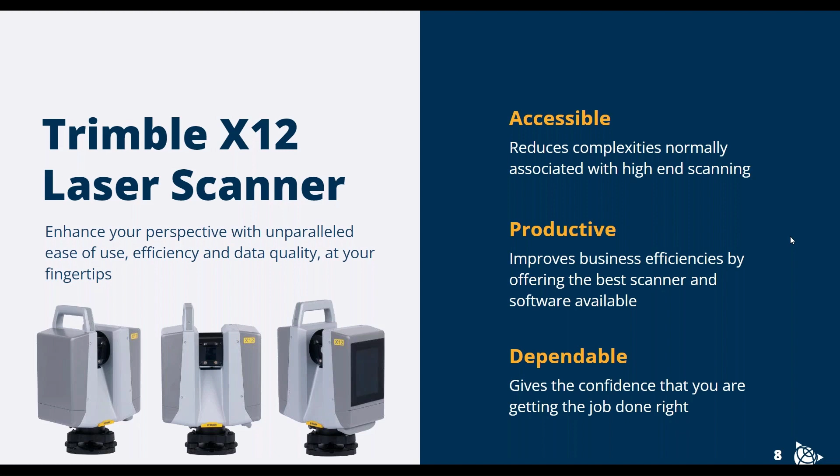Awesome, and yeah, let's get started and let's learn a little bit about the new X12 laser scanner. So starting off, this is obviously our new high-end scanner that complements the X7 well for applications that require longer distances. So when we really talk about how this unit is accessible, it's really bringing that same simple workflow. If you're familiar with the X7 workflow and Perspective, it's a very easy to use, streamlined workflow to get your scanning project done in an efficient manner without having to go back on site.

So if you haven't been able to use the X7 yet or the X12, I highly suggest reaching out to Keystone and getting a demo of the unit to really understand how the software works. And I really think that anybody who uses it will really enjoy it, especially the field crews, and how nice it is to have that tablet with you to be able to register your scans together on the fly.

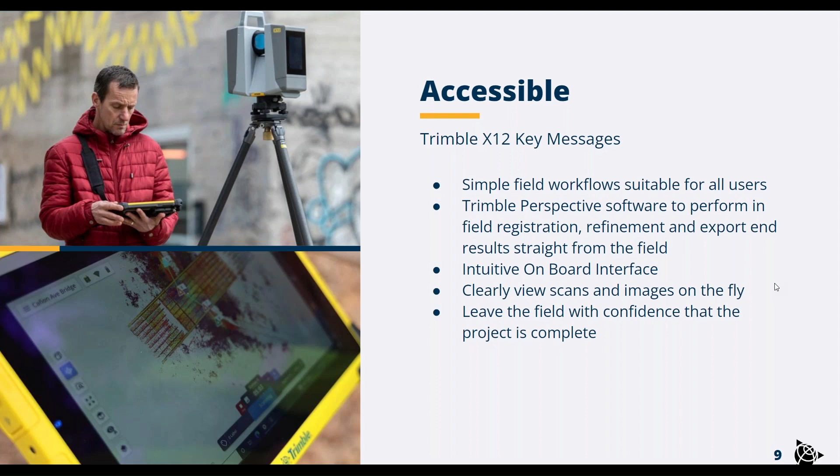Now, with the X12, it really is a fast scanner that can get you really great data on site really quickly. The shortest scan is up to 23 seconds. One of my favorite features that we'll go into a little bit later is that integrated LED spotlight. I have a little anecdote, but I'll save that for a slide later, but it is really one of my favorite things about this scanner.

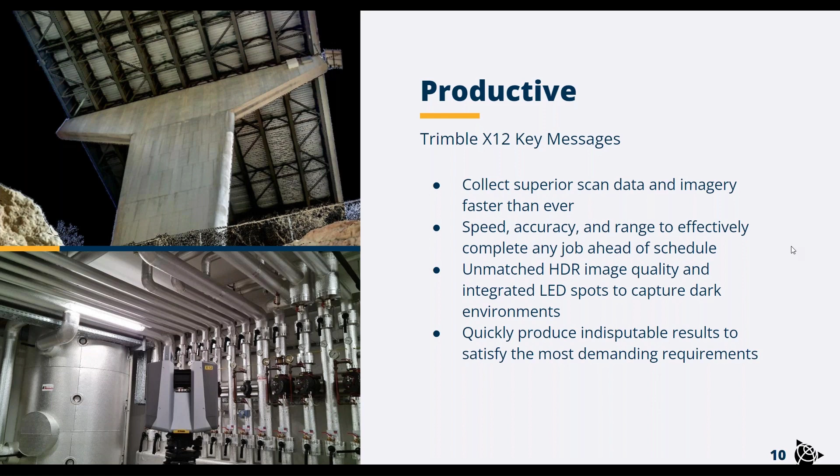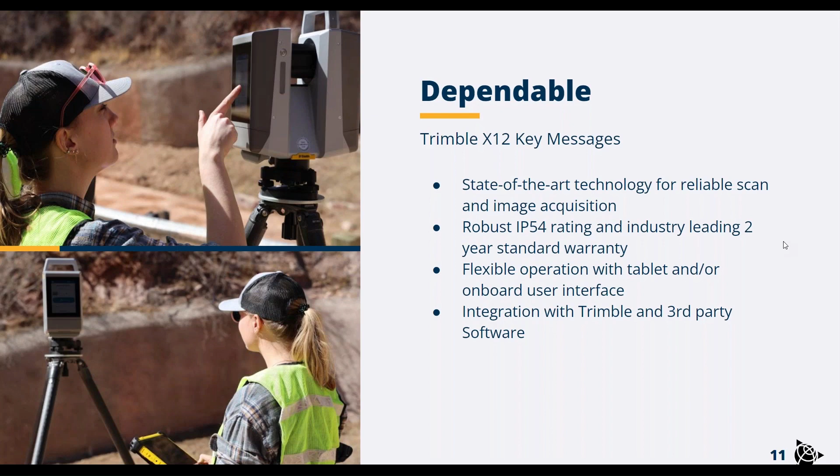And dependable. Our MAT team, when we test this, we really put this through quite a bit to make sure that it was up to the Trimble standard. Just like with the X7, this has a standard 2-year warranty. And we'll go into it more, but you'll see that unlike the X7 here, this scanner actually has a full onboard interface. And we'll show you the highlights of that a little bit later.

So highlighting some of the key features here. I'm just going to go through only a few of these things just to highlight. These are all important, and depending on your application, some of these may be more important to you than others. I highly suggest going to the website and downloading the data sheet to check out the specs a little further. So looking at the range of this scanner, this is a much longer range scanner than your typical X7. So if you're trying to do any applications where there's a lot of distant vertical objects, this scanner really will shine in that area.

And this is a phase-based scanner. The X7 and a lot of the scanners in the industry are time of flight, and really the difference between a time of flight scan and a phase shift scan is that it's actually a sine curve. So it's measuring not only how long it takes for the return, but where in the return it is. So you'll notice if you download the sample data set on the website, a lot of the vertical objects are really clean data. And that's really beneficial, especially if you are doing any larger things like a plant.

And then lastly, looking at the imagery, this can be really important depending on what your deliverable is to your clients. This parallax-free imagery really creates a point cloud that looks like real life. And it's really shocking that you can actually look at a point cloud and be able to navigate it as if it is just imagery, because it does look so clean.

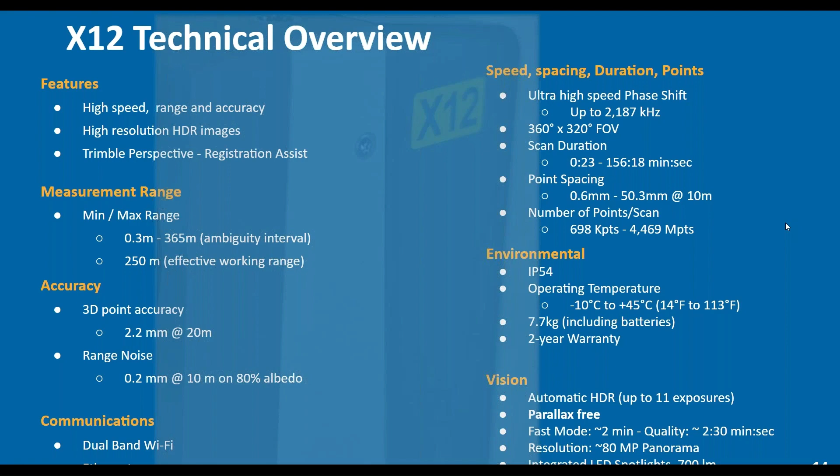So looking at some of the scan times and quality settings. This scanner does have a few more options in terms of how you set your resolution and your quality. Again, I really think that most people should get a demo to really experience the scanner in whatever application they're doing. But the quality settings really reduce your range noise. So if you have an application where you want really tight tolerances, you can crank up that quality setting. But honestly, the speed setting on the left-hand side, which is the fastest setting, usually is good enough because the range noise on this scanner is so low inherently.

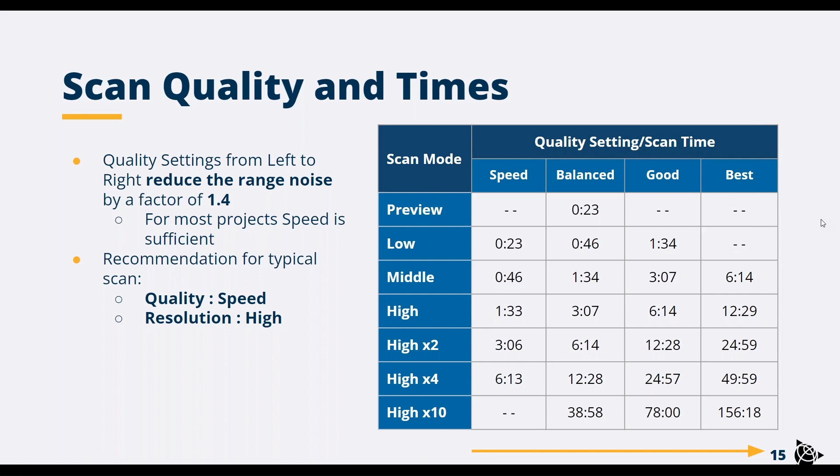And then as we go up further, you'll see there are some scans that are pretty long, but one of the really great benefits is that we have the ability to take area scans. So if there's anything that's of interest, you can use these longer time scans on just a specific focus inside of that station setup.

And looking at the camera settings, so really just highlighting this quickly. So there's two options once you decide to turn images on. So that would be fast mode and the smart light. So the smart light we'll get to on the next slide. And that's, again, one of my favorite things about this scanner. But the fast mode really is just changing how many exposures you take at each camera setup.

I would say probably about 80% of the time, it's okay to just leave fast mode on and take those less exposures and save a little bit of time on the images. But when you are in more difficult circumstances, it is nice to actually turn fast mode off and get those extra exposures, depending on how much you value the camera settings.

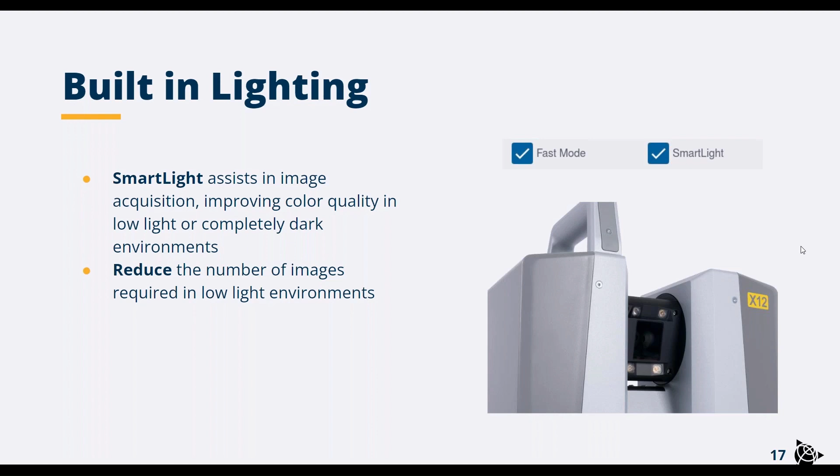It really did a great job, to the point that I ended up staying in the room and taking another scan with the lights off because I thought I had turned the lights on by accident. It really is nice. And coming from someone who valued the camera quality, I used to have to go around with external lighting and bring it to the setups to actually bring light. And this is really just getting rid of any extra external lighting that you need. So if there are darker areas in your project and you value the camera, it really is a great highlight of this scanner.

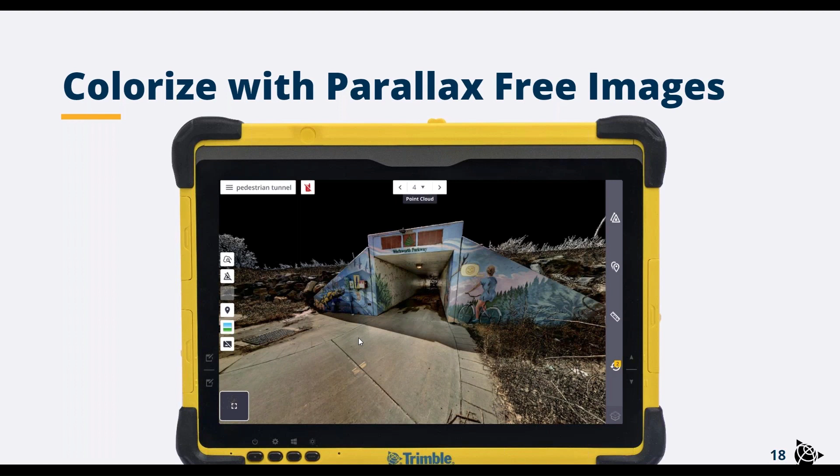You can see all of that art on that tunnel, the grate there on the side, and all of the detail in the concrete. So if there is anything you need to go back to, or if you need to georeference it later, you can easily navigate through the point cloud and see exactly where you had put down control, and it makes it really nice to go back.

So now I will hand it over to Jeff, and he'll talk about Trimble Perspective with the X12, which really is a fantastic setup. Yeah, thanks, Alex. So a major focus of this product development was Trimble Perspective, which is an integral part of the X12 solution. As Alex mentioned, much of this comes down to just how easy Perspective is to use, with a short instruction period, and really anyone can get up and running within a matter of minutes.

And this is due in large part to the UI being set up in such a way that navigating through the different steps of a scanning workflow is intuitive, leaving little downtime so you can maximize your efficiency. And since many of the operations are available on the fly, you can utilize the robust tool sets available, like registration, measurements, and annotations, while your scanner is capturing data.

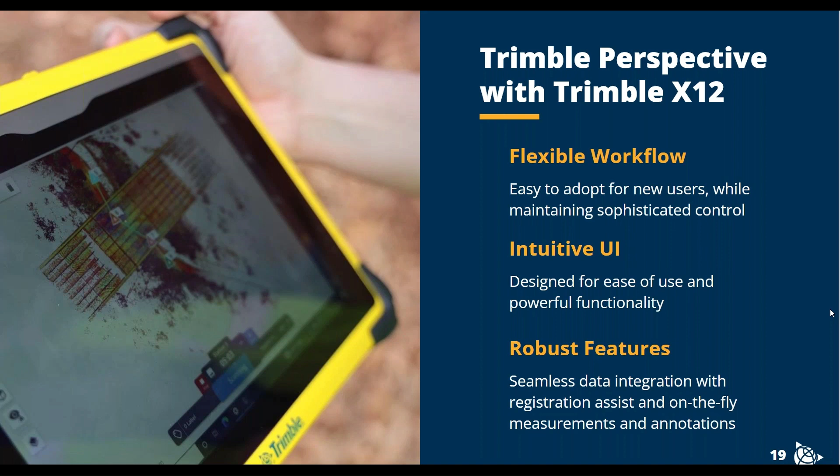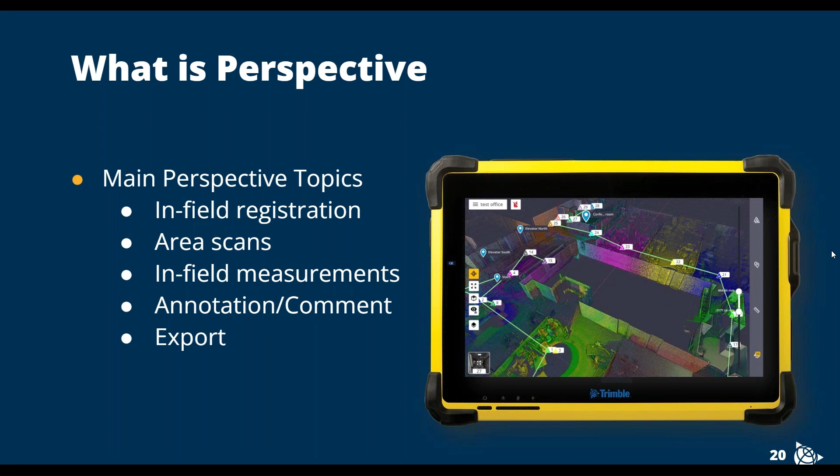So here's a brief overview of the highlights Perspective brings before I dive into each a little further. So of course, Perspective allows you to control your scanner with scan times, resolution, and images, like Alex mentioned. But you also have the ability to register stations while you're in the field. And there's automatic and manual processes, along with a refine option for the finish. You can perform area scans, so you can provide higher density on specific parts of your site, take in-field measurements, create annotations, and then of course, export your data out so you have a number of file format options.

Now, Perspective's default setting is to automatically register the current station to that of the previous station. The process can be performed while the scanner is taking images, while you move to the next station, or during the next station scan itself. You can select your current station to register to another station as well from your project. So all captured stations are available within a drop-down list from the Scan Parameters menu and can act as a reference station.

Your project registration can also be verifiable in the field by viewing the 3D display like we're showing here on the right. So there's a variety of tools available to evaluate the quality of your registration so that when you get back to the office, you know everything should come together like it should.

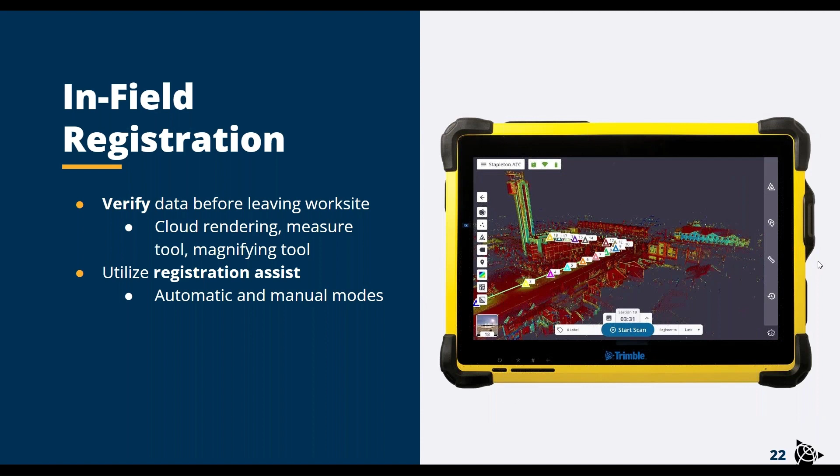The ability to perform area scans was a major ask from customers that was delivered with the X12. Based on the positive feedback we received, the latest Perspective release also introduced area scans for the X7. This tool lets you fence in a specific part of your project, scan at a higher density, and away you go. You can queue up multiple area scans in a row so that while one is being performed, you can section out area scans for the next sections of your project.

Typical uses of this would be to densify coverage on something that's far away, targets for registration or georeferencing, or say something was in the way and now it's no longer obstructed. A common workflow would be to do a short full dome scan, like the 23-second scan, and then up your density for the specific regions that really need it. This saves you time from having to complete high resolution full dome scans that collect points you don't really need, and it reduces the file sizes of your station.

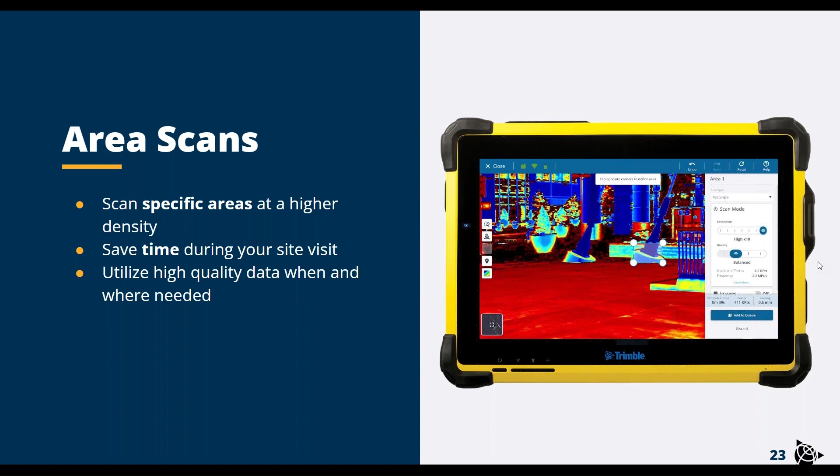While your scanner's in action, you may want to check distances, or a client approaches you with questions about the scene. You have the ability to take measurements of any collected scan from a station view or a 3D view. By default, slope distances are measured, but this can be modified so that you apply constraints and obtain horizontal or vertical distances. You can use this to check clearances, dimensions, or offsets to other objects. You can also use multiple lines to bound areas or identify single points to get their coordinates. All this can be done while the scanner is capturing data, allowing you to maximize your time in the field.

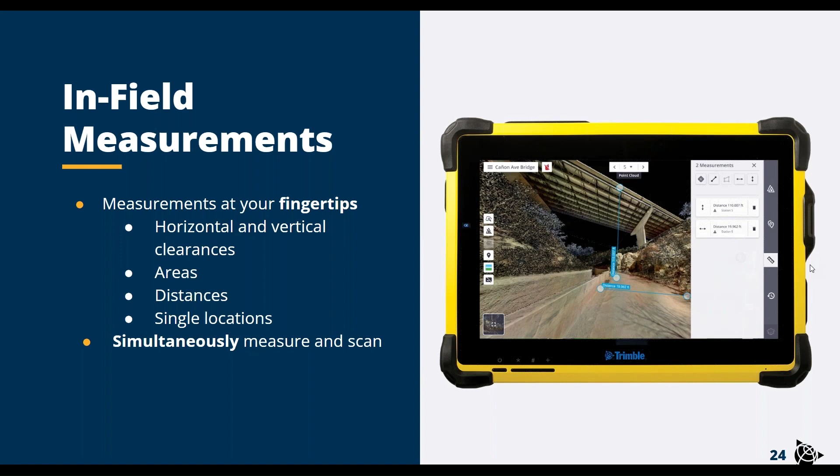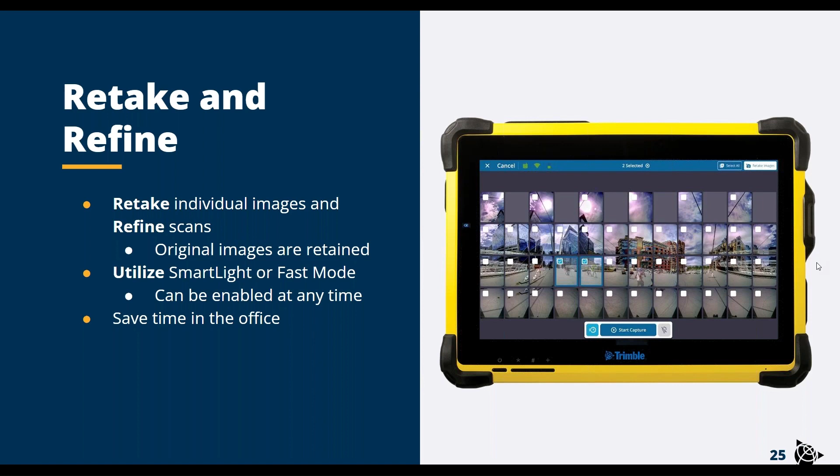Once satisfied with the project, click Finalize, where you can refine the registration, generate a registration report, and create high quality panoramic images.

Also available with the X12 in Perspective is the ability to georeference in the field. Georeferencing points can be defined by the user by creating annotations, where you zoom in really close on a spot in your field, place the marker, give it an ID, and then save that point. You would complete this for 3 or more points with strong geometry by good survey practice.

These annotated points now need control points to apply the georeferencing. You can either import or type in control points and then match each control point to the annotated georeferencing point. Perspective will best fit the georeferencing points with the control points and then display the residual errors to you.

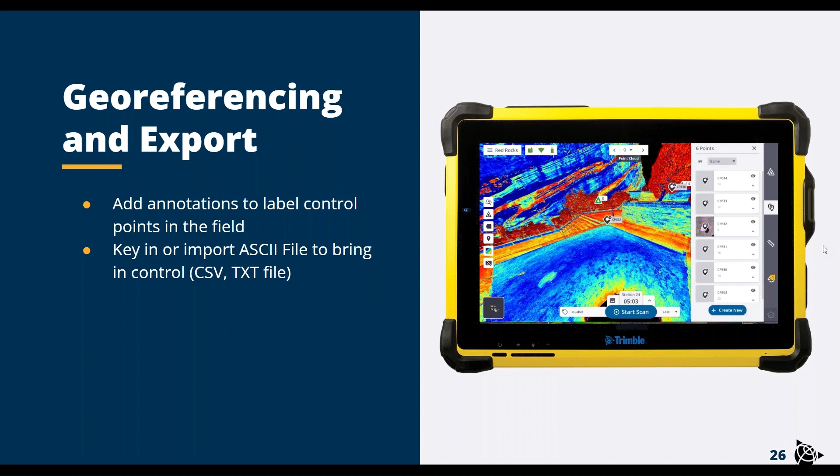Another great part of this system is the workflow flexibility. You can go into the field with Perspective on your tablet, control the scanner, complete and check registration, and perform all the actions I previously mentioned.

Alternatively, say you don't have a tablet, the battery died, or you choose not to use one. You can work solely on the X12 onboard UI. You have the same ability to choose scan parameters, retake images, and perform area scans just like you could on Perspective.

The other option is a combination of both workflows. For example, say you start your project using the tablet, the battery dies, and you don't want to switch it out. You can complete the remainder of the project using the onboard UI. Once the tablet's battery is swapped out or put back on charge, simply reconnect to the X12 and sync the project. All scans will be imported to Perspective, and the automatic processing and registration operations will take place.

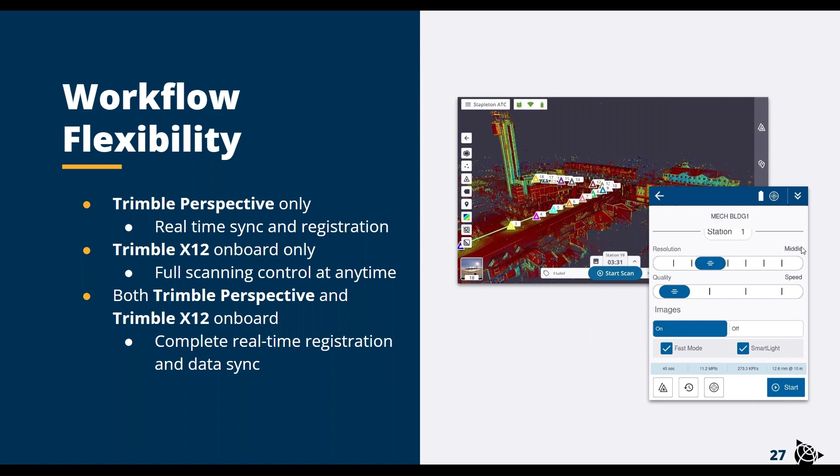Now I'll hand things back to Alex, who can go over the X12 onboard UI in greater detail.

Awesome, thank you, Jeff. Yeah, really just reiterating almost exactly what Jeff said, but this onboard UI working with Perspective really does work really well.

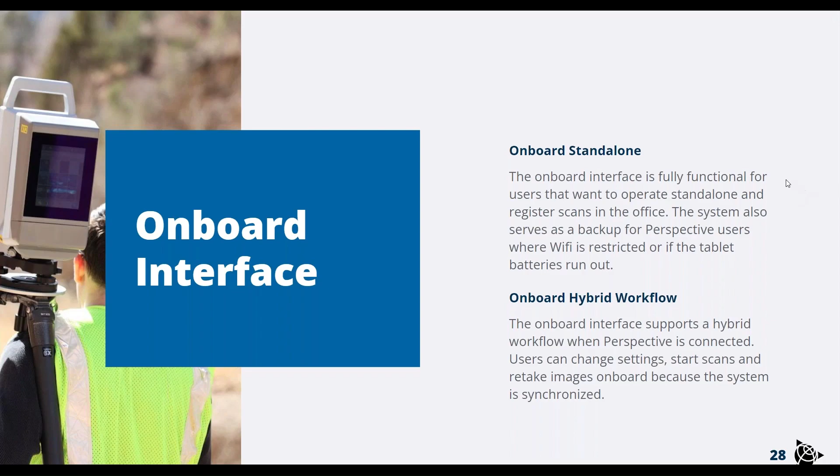The hybrid functionality of having that onboard UI with Perspective is really beneficial. We put a lot of effort into making this onboard UI very similar in terms of an easy workflow for somebody who prefers not to carry around the tablet. This hybrid workflow allows you, if you need to put down that tablet for any reason and bring the scanner into a scenario where you might not feel comfortable carrying both, you can start that scan from onboard and then view it in Perspective once you get back to your tablet. So highlighting the onboard workflow.

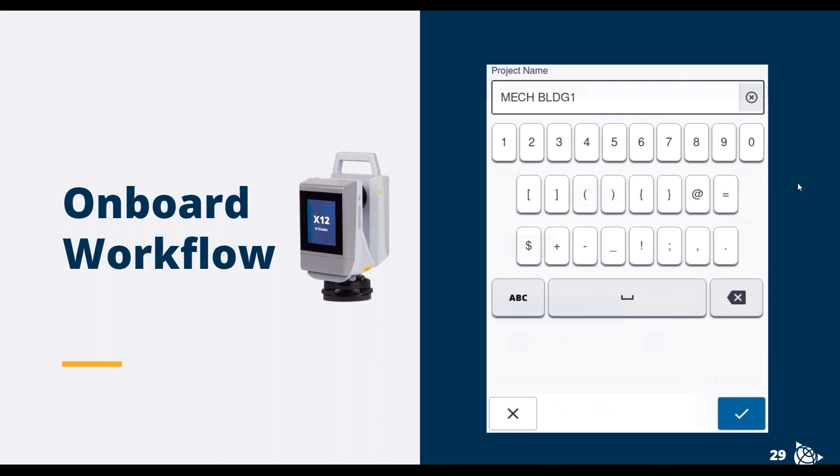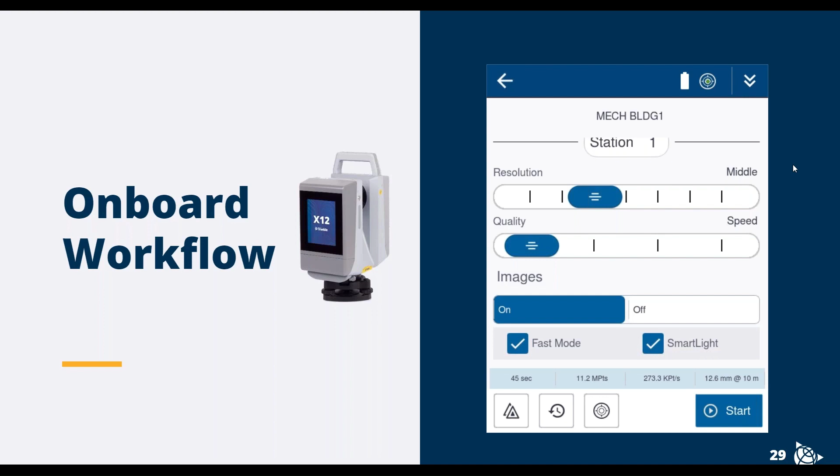When you open up the scanner, you'll be prompted to set a Wi-Fi password, but then you'll be able to create a project. First we can create a project. You have a full QWERTY keyboard accessible on the onboard UI, and once you create that project name, you'll go right into scanning. Similar to the setup in Perspective, you'll be able to choose your resolution, quality, and whether you want images on. Once we're good to go, we can just start that scan.

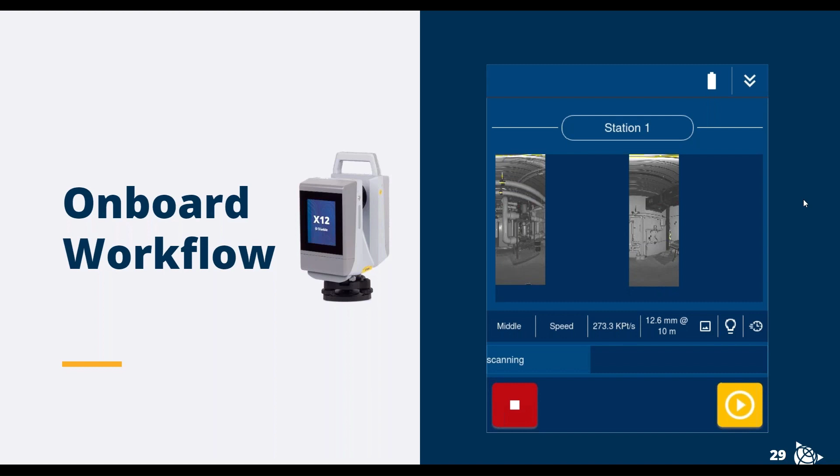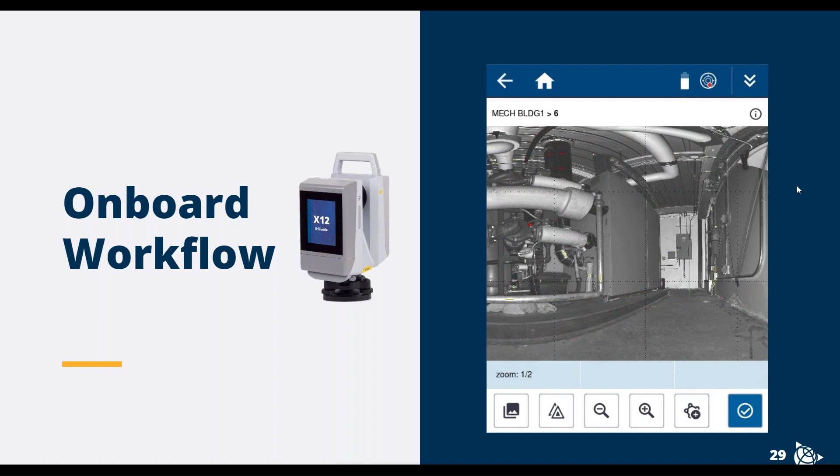One benefit of this onboard UI is you can actually see the scan coming in live. So even without Perspective, you can do the scan dance and walk around the scanner as it's scanning and see the data come up live. Once you're done, you can navigate around the scan and see if there are any issues. Just like with Perspective, you can actually do area scans onboard too.

If you get into a situation where you're not able to use Perspective, or choose not to, you still have all of that same functionality in terms of workflow that you have in Perspective on the onboard UI.

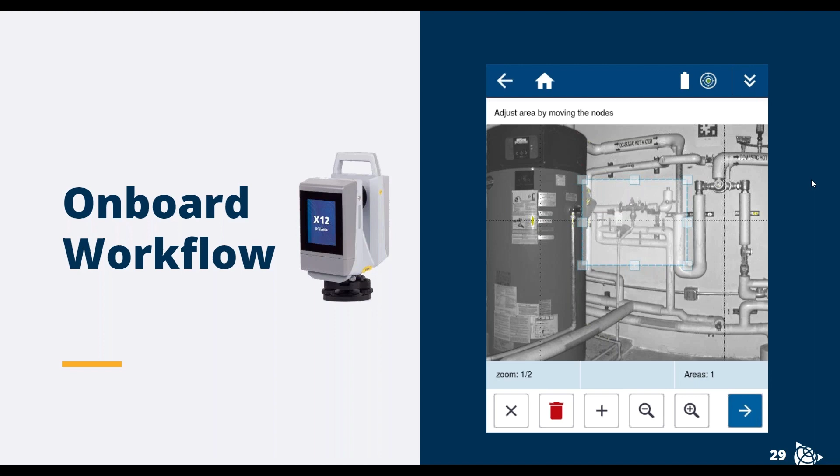Just like Jeff was showing with Perspective, you can retake images. In this one, I intentionally stood in the images, but we're just in a mechanical room, and I can easily retake those images. One thing I want to highlight here with this retake is that you have smart light and fast mode as options as well.

If there's a scenario with a darker corner, or maybe you're scanning under the stairs and there isn't much lighting available because of the building, or if you're in a trench with not much light, you can easily turn the smart light on for specific images to get a brighter picture, giving you a more consistent flow in all of your imagery.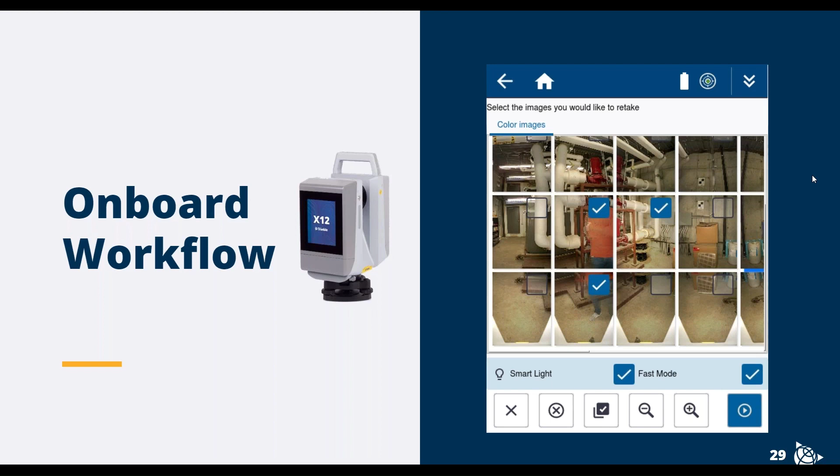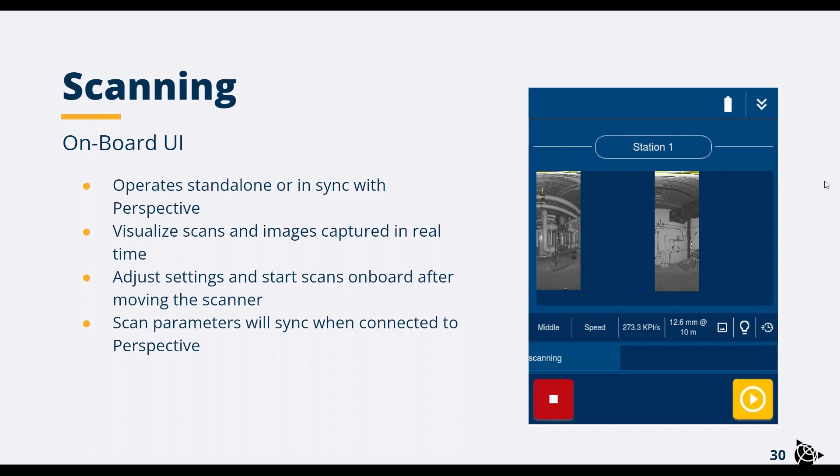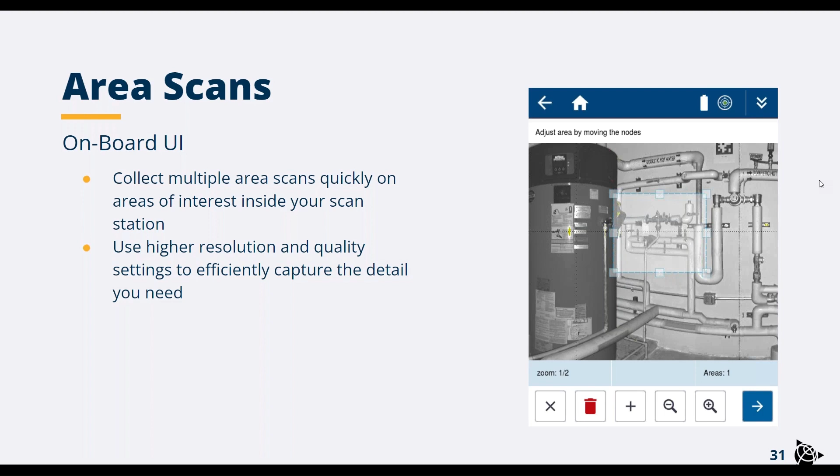So scanning on the onboard UI, yes, you can adjust your settings, you'll see that in real time, and everything syncs up to Perspective. With the area scans, just like Jeff mentioned, you can queue up multiple ones even on the onboard UI. So if you do that 23-second scan and have multiple areas of interest where you're just trying to get good data, you can easily set up multiple area scans on a high resolution density to lower that overall scan size.

Now looking at Trimble Installation Manager, a few things I want to highlight. One of the coolest things about this scanner in my mind is you can actually keep multiple firmwares on the scanner. We come out with quite a few Perspective updates, and sometimes I'll update Perspective and forget to update the scanner, or update the scanner and forget to update Perspective. But with this, I can always keep one firmware behind, so if there are any problems I can just go back to the last firmware and it will work seamlessly with Perspective.

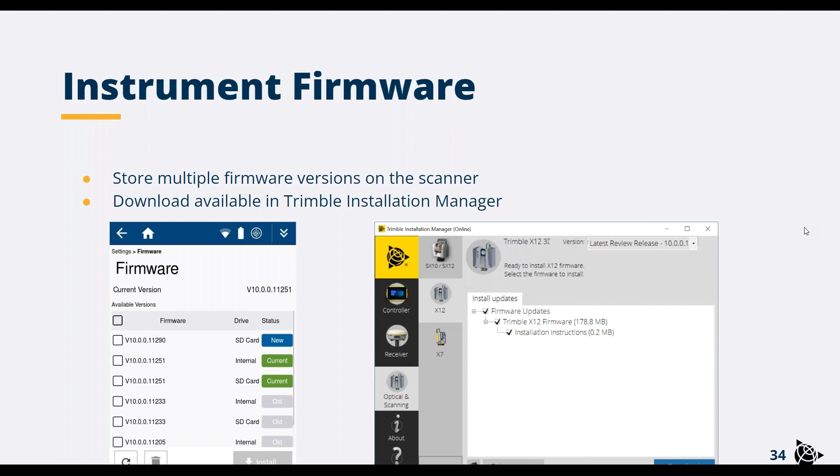The other thing to highlight is that the Perspective software itself is identical to the X7. So if you ever get into a scenario where you're using an X7 and an X12 on site, it's the same download, and the software will automatically identify what scanner's connected and give you all the correct parameters to be able to scan.

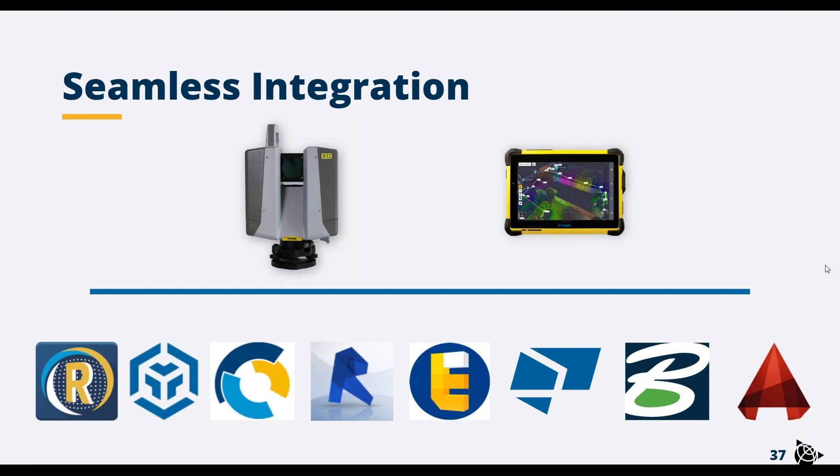Thanks, Alex. So with X12 and Perspective, there are a number of export options available to you, so you can bring your project into your Office software of choice. File formats such as industry standard E57 can be converted right on the tablet.

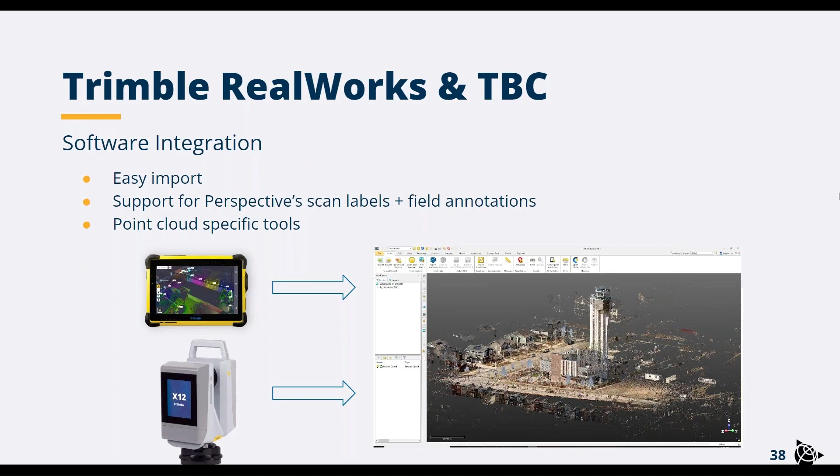And then if you're using a Trimble Office software such as Trimble RealWorks or Trimble Business Center, you can use the familiar Trimble point cloud formats such as TZF files or a TDX project. You can simply drag and drop your project into your Office software and utilize the full capabilities of these powerful platforms. This includes visualization, segmentation, modeling, inspection, and any of the other numerous deliverables available from the Trimble geospatial ecosystem. Now back to Alex for some applications specific to the X12.

So looking at the first one, topographic and general survey. I just want to highlight some of the benefits. This scanner really can be used in most applications, but some of the best things about this scanner for general survey really is looking at the power of the Office software and what you can do in the field. So assigning labels and images, going through that annotation workflow, and if you are going to georeference, having all of that data coming right into TBC really makes it beneficial if there is someone in the office doing things differently than the person in the field, so that they can know what's going on in the field. Again, in the Office software, we have the ability to auto-classify quite a few things now, being able to extract out your ground and having that point cloud data. Instead of having just one point cloud, you're able to really segment out your point cloud.

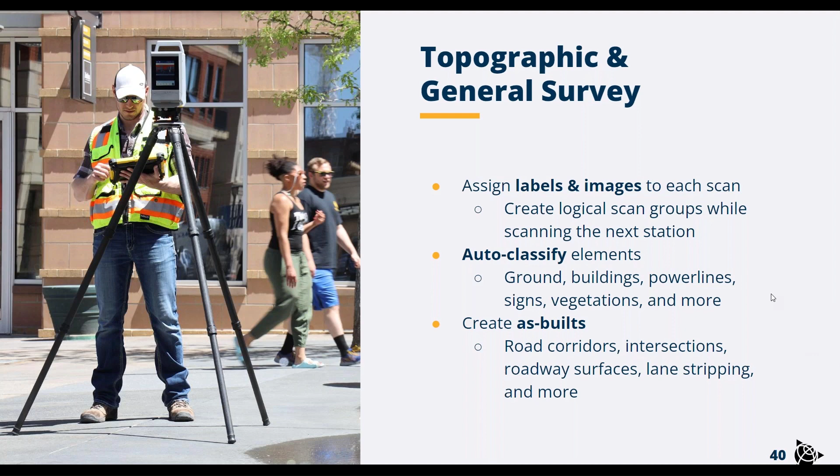Looking at civil infrastructure, this scanner can go really far and can help scanning bridges, landslides, things of that nature, where you need to get all of the data there and you have to get it quickly. One of the really great benefits, again, is those area scans. So if there is a specific point of interest on a bridge or something, you're really able to get that at high resolution and very low range noise. And again, verifying that in the field before you go back to the office.

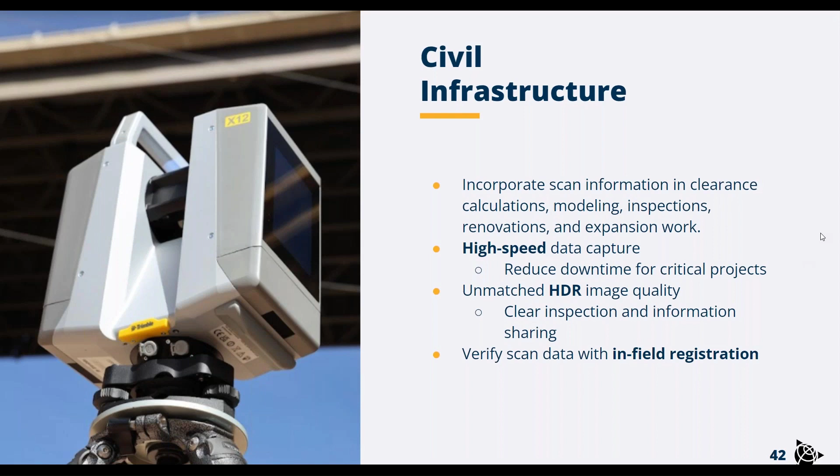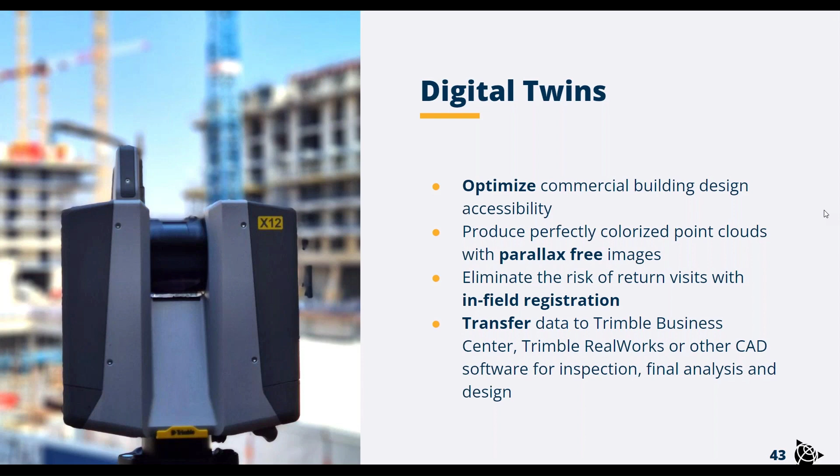Looking at digital twins, depending on who you are giving your deliverable to, images are just really important, especially if something is going to somebody like an architect. Having a point cloud that is much more digestible with such great scan resolution, but also that colorized imagery, where I know a lot of architects will like to go through the imagery. When you have again such a great quality, you're able to much more easily navigate the point cloud, and it makes their life easier as well.

Looking at industrial survey, this scanner does really well on some of those difficult surfaces. So if you're inside of a plant and there's a lot of shiny piping and things like that, you're able to up the quality and really get some good detail on any joints or valves or anything in particular that you're looking at as you're going around a plant. Again, you can use the great resolution if you are trying to get onto a plant coordinate system and being able to make sure you have all the detail you need on any control you have as well.

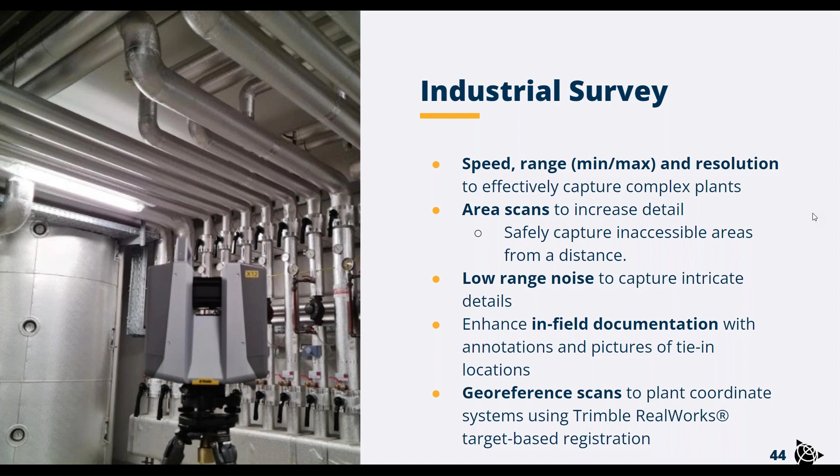And then looking at tank calibration and inspection, one of the highlights here is that LED SmartLight. Obviously inside of a tank, it's pretty dark. And if there is anything in there that you do need good imagery on, if there is any enhancements coming to that tank, you're able to just turn that LED SmartLight on and have imagery inside the tank instead of having to run any power into the tank to be able to actually get those images.

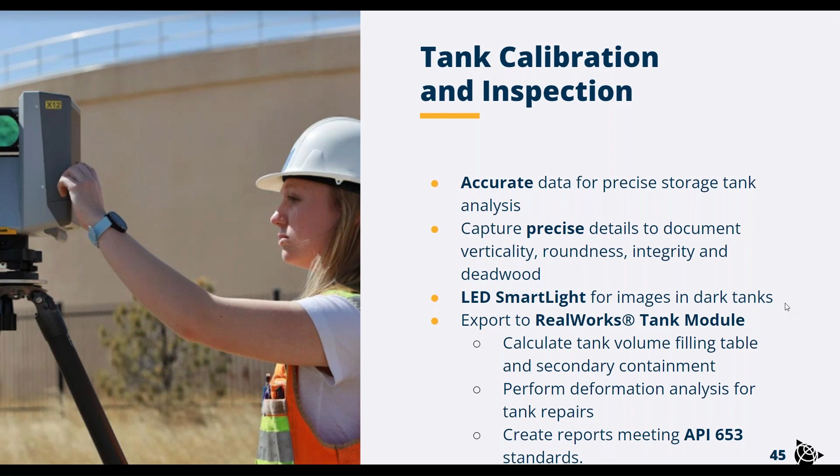And then shipbuilding. So one of the really great benefits about this scanner is that 0.3 meter minimum range. So that is pretty tight, and a lot of ships have some pretty tight spaces, especially when we look at ballast tanks, which are becoming more and more common to scan as people prepare to actually retrofit them for new water treatment systems so that they're able to empty the ballast tanks while following the IMO mandates that have changed to prevent people from putting water where they shouldn't.

And again, the high detail of this scan and the range allows you to not only scan inside of those tight spaces, but also in those larger spaces that are on ships once you get up to the very large fleets.

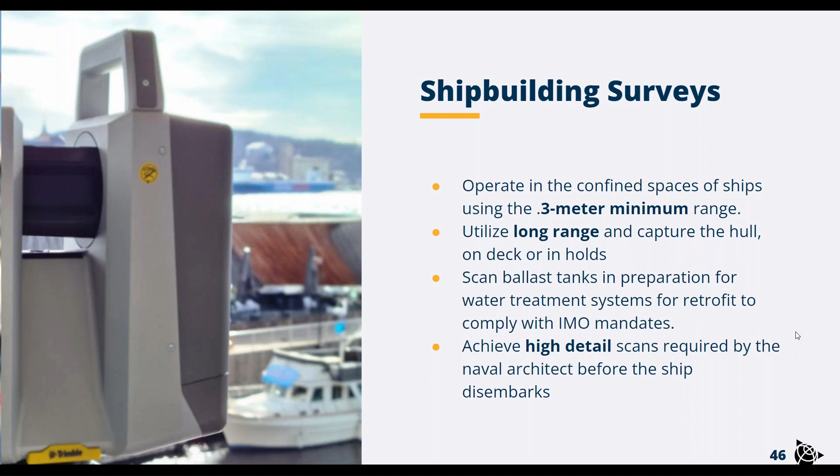And lastly, forensics. Again, any forensic scenes, so obviously a scene could happen day or night, and having those LED SmartLights to be able to capture images on a crime scene when it is during the nighttime is really beneficial for any police that are using this. And this really would go towards more of a high-end crime lab that's interested in really capturing a lot of detail inside of the Forensics Reveal software.

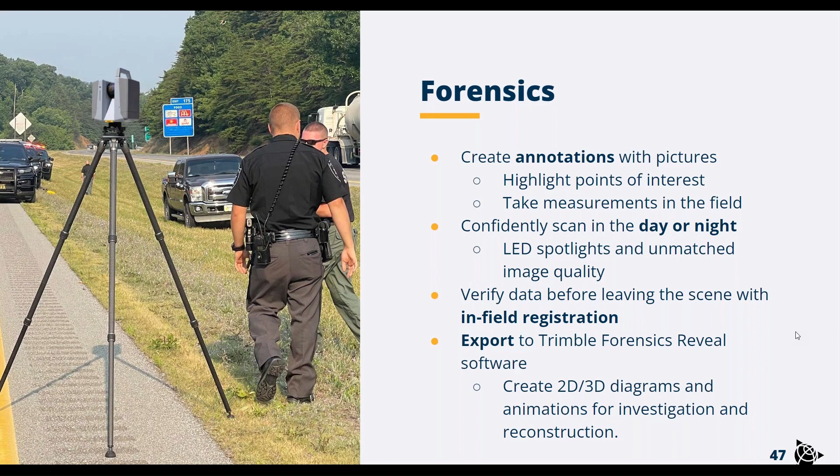And again, with the annotations carrying over from the Trimble X7, they're able to document things on site with both the camera of the scanner, but also the camera of the tablet.